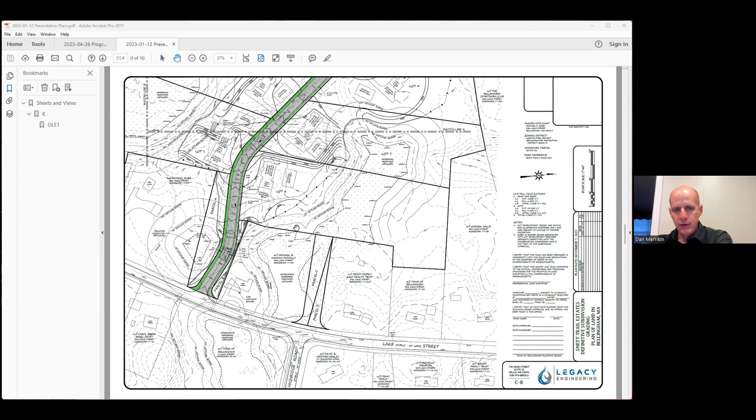Okay, just an update. I know you guys talked about this at your last meeting, but I was not there. Over the last month or so, 2 site visits were conducted by the commission, resulting in some changes to wetlands delineations. This plan doesn't reflect it, but in the small isolated wetland out front, there was a small expansion, which hasn't really changed anything. There was a minor flag change down here, which doesn't really affect anything. The bigger change was that...

Between the upper wetland area, which was observed at the last site walk to be a vernal pool—so it would be a local bylaw vernal pool because it has not been certified yet—a wetland was identified, basically resulting from periodic and intermittent overflows from this upper wetland down through a valley area that extends down through this way, which results in shallow ponding, shallow puddling, and some wetland vegetation.

So that was reflagged by our botanist, and it was inspected by the commission 2 weeks ago, I think. So we've had those field located, and this is the boundary that the commission observed. There you can see it's basically a thin wetland area that goes down right along the valley here, and then it widens out. This was the old end of the wetland, and it widens out at the end.

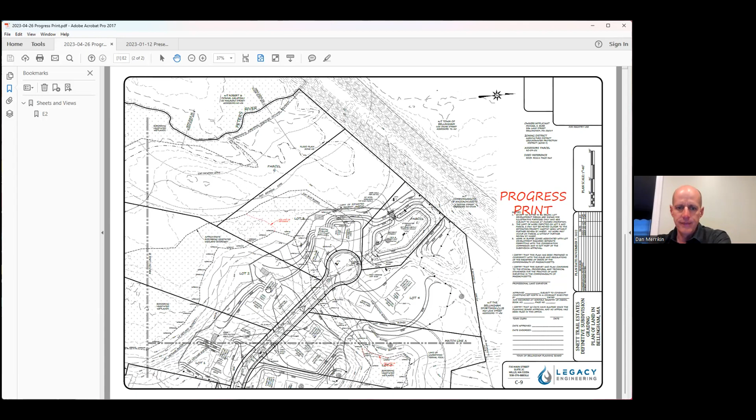So we are working on a revision to the design. This is the submitted plan, with that new wetland area shown. So there is now a crossing of the road through the wetland. We're working on a revised notice of intent, reflecting the fact that there will now be a proposed wetland alteration with a restoration area.

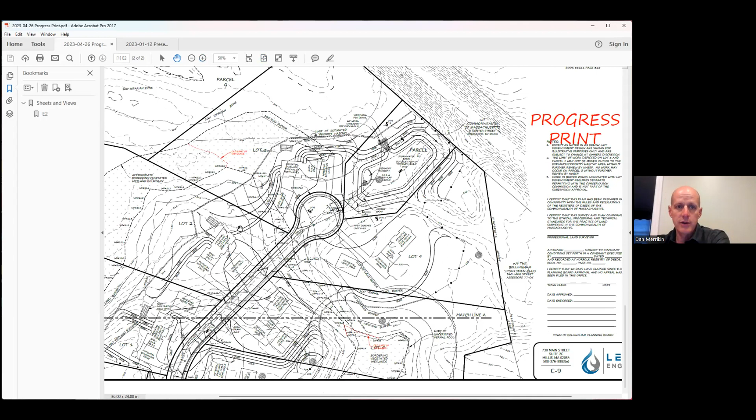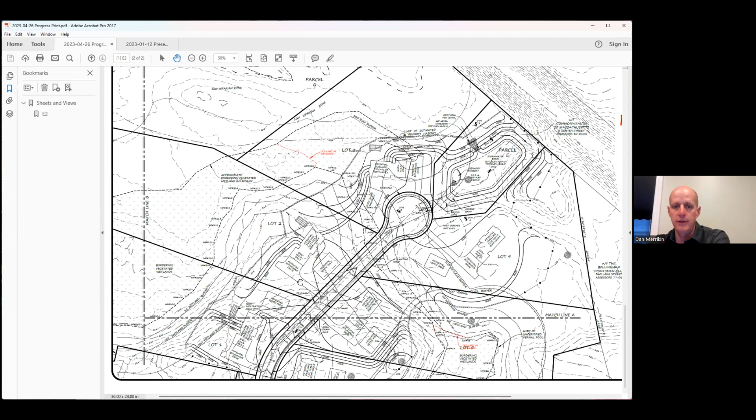And the restoration area will be located—this area down through here is an old cart path, and we walked it with the commission at the last site visit, and it looks like a good place for a wetland replication area. So we'll be proposing, in the vicinity of flag 209 to 203, a wetland replication area here, which will basically fall within the footprint of that old cart path. So I think that'll be a nice area to do some replication.

And then we are going to realign the road to take this cul-de-sac and pull it further away from the wetland area so that this lot and the house and the yard will be able to be further away from the wetland areas. There'll be a small, probably modification of the stormwater basin design, so we're working on all that. I don't have anything to show you on that yet. We're going to need, I would say, a month to get that revised design squared away so that I can submit it to you with an updated subdivision plan, stormwater report, and notice of intent.

Well, that is certainly the drill. Dan, that's in a nutshell exactly what's occurred in the last two site inspections. I will just say that the area you're proposing for replication, we did some preliminary field evaluations by hand auger and found that immediately adjacent to that cart path there were hydric soils, and once you got through the area that had been historically filled, there was an area of original A horizon there, which was hydric.

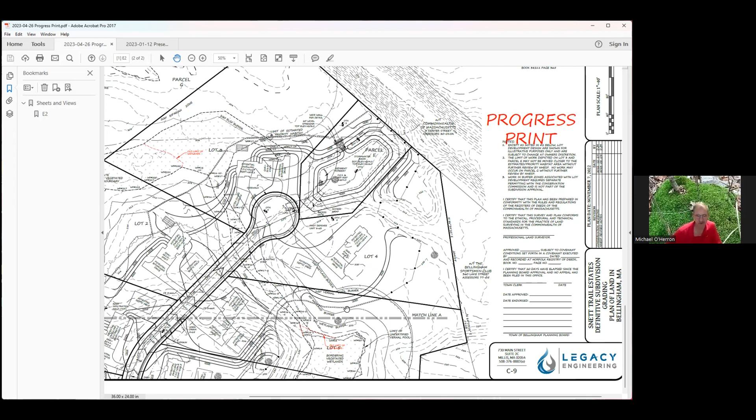So there's actually a lot of room on lot 4 for the house. We weren't sure what other areas might be like depressed areas or wetlands. No, this is a big hill, and this is a big hill. And this is the old cart path that leads down to the river. So there's lots of room, upland areas for lot 4. So what we're going to do is transition this cul-de-sac out into this territory. It'll open up room over here, and then this house will probably slide back into this territory. Gotcha, okay, so it's not impacting the full vernal pool buffer, great, okay, thank you.

Very good. Any other questions or comments? All right. We have only one meeting in May because the commission is obligated to attend the annual town meeting, which always occurs on the second Wednesday of May. I don't know why it's always on one of our meeting nights, but it always is. And so...

What we'll do, knowing that the applicant will need some time to complete these revisions, we'd like to continue this to the evening of Wednesday, June 14th at 7:30, which is our first meeting in June. So moved, June. That's Michael. Is there a second? Second, Neil. Any further discussion?

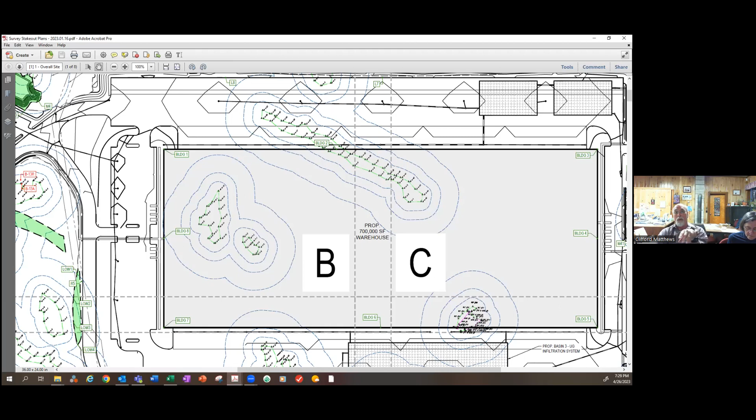So it's operating in a marginal capacity. Is that a fair characterization? Yes, in our site visit, we did not discover anything that would indicate, as the local bylaw states, breeding activity. But what I'm going to say is that, as our administrator pointed out, vernal pools are ephemeral, and year to year they function in different manners. Last year there were a couple of egg masses there, and that does constitute breeding activity. So Austin, what we're going to do is we're going to ask that that area be included in the area that requires mitigation, along with a couple of other areas that are proposed to be impacted.

Yeah, and I agree with you, Cliff. The purpose of me saying that wasn't to try and get it out of that. It was just to kind of understand and characterize the conversation. But we'll talk about some of the mitigation, because we had a productive discussion on that as well. The second item we did, this area here that I'm circling, that's wetland Y, the one that, if you recall, was kind of a newly identified resource area as part of these discussions, and one which exhibits the characteristics more traditionally of an active vernal pool area, right? So we looked at that and confirmed essentially what we already thought we knew, which is there was activity in there. I think we found some fairy shrimp as part of that initial sweep, if you will, on Saturday morning.

Yes. Okay. And then we continued our journey across the site, and we got down to this little spot here, which is our southernmost replication area, which is going to be serving as wetland, and even more importantly, vernal pool replication. We spent some time looking in there to see if it was an appropriate location. We did some light soil augering and some shallow excavation, and it looked like, at least on our initial reaction collectively as a unit, we thought that area looked favorable for wetland replication and vernal pool replication.

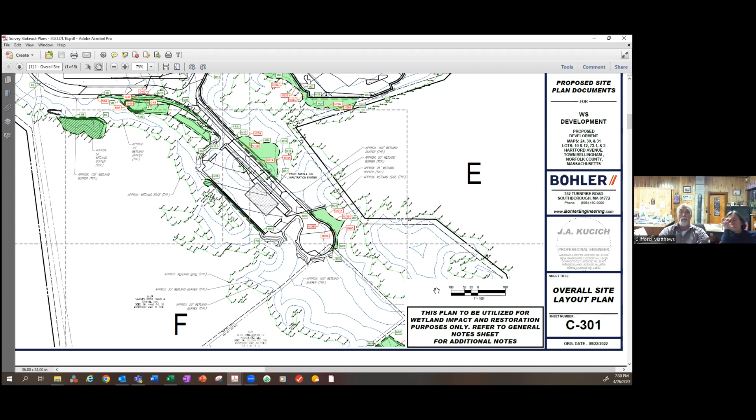Austin, just a quick point of order, if I may. Also, if you go back, back to the east. Okay, we did look at the isolated area, which was a deep pocket. I think it was wetland U.

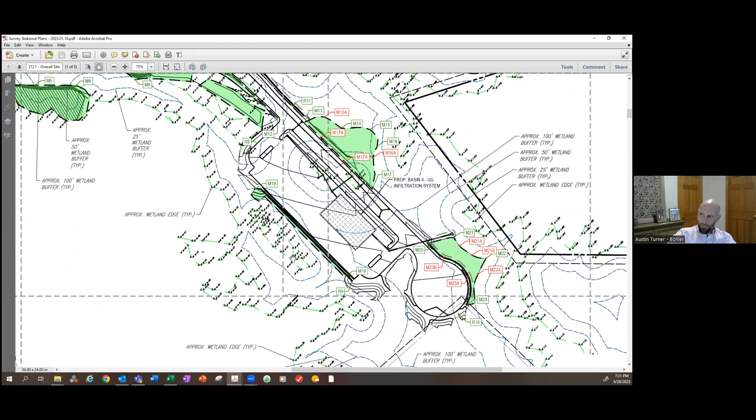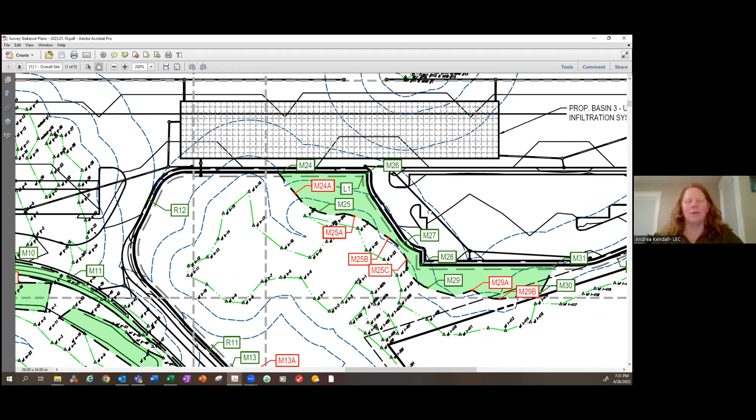I thought you was— oh, that's Q, sorry. Yeah, I think you're right. Brian, you want to navigate me to where U series is? You keep going, you're going in the right direction. Yep, a little more, okay. No, now move the other way. Go to the right, this way? Right of Y, north and east. Correct, yeah, there's this pocket right here. Yep, that's it. Is that you? I think that's you. That is you. Okay, yes, it is, fine.

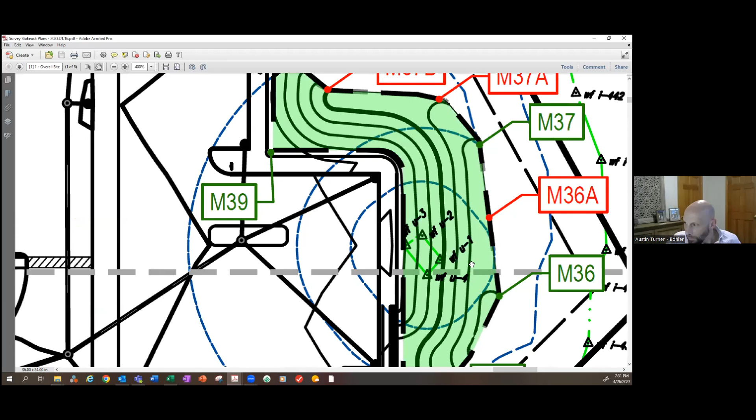All right, so when we were out there very early on, was it this year? I can't even recall, we've been out there numerous times. We were out there and identified it as being possible. Brian indicated that in all of his observations, there was no vernal pool activity. But the last time we were out there, it had apparently the depth that might provide breeding activity possibilities. So we reviewed that and found no activity. It was dry and had been dry. Brian is there, I think he looked at it last spring.

And was the hydro period too short there, Brian, as well? Yeah, this is the third year we've taken a look at that area, and there's been no breeding activity, and yes, it does dry up rather quickly. Okay, so then I think the commission will concur that we don't have to worry about including that in any kind of future restoration or mitigation efforts.

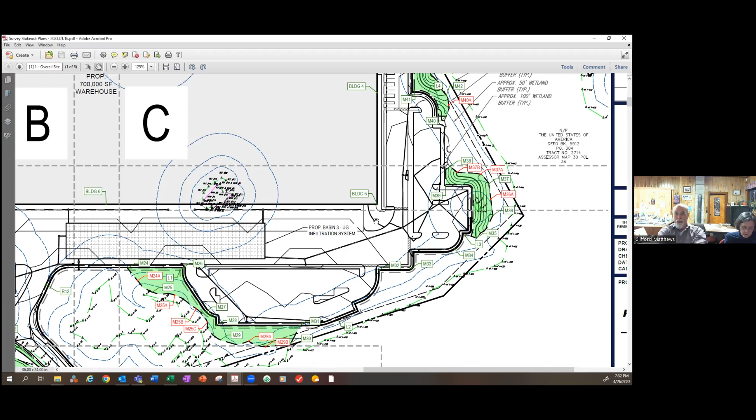Thanks, sorry, no problem. I'm glad you stopped me because I do recall us going over there, and then we walked kind of cross country over to this mitigation area, which collectively we thought felt appropriate given what we saw in terms of elevation and general site features.

We did some light augering and some holes to see what the soil material looked like, and all those things felt like we were trending in the right direction. One of the notes I made was there were some cedars growing in there, and we were going to take special care as the design evolved, and presumptively when we get to construction, to maintain those species.

Because we felt that was going to be an important characteristic of that system. That correct? Yes. And I think Brian and Andrea had indicated their intention, that their plan was to flesh out and come up with a comprehensive plan for mitigation.

We also did some soil work there and found that it appears groundwater is extremely close to the surface in that area. And based on that, plus the immediately adjacent area to the south...

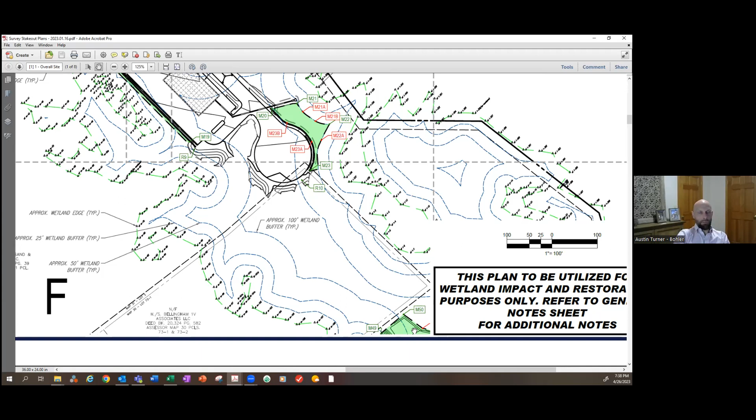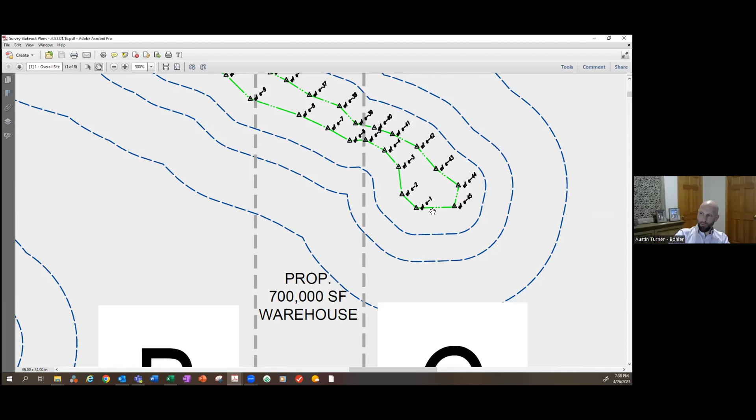The mitigation that we have on this plan is direct replication right now. It's approximately 64,400 square feet. The ratio there equates to about 1.6 to 1. In that 64,000 plus square feet, the vernal pool areas we're talking about include the entirety of Y, which is the green boundary. This little purple boundary is what has been established as the mean high water level, but we're counting all of Y in that mitigation, which is the green boundary plus an expanded footprint. And then this lower lobe of E, essentially between flags E42 and in a clockwise pattern to E3, is what we established. Cumulatively, those two vernal pools are approximately 4,400 square feet. So by way of a quick reset, we have over 64,000 square feet of actual wetland mitigation proposed.

4,400 square feet is what's being considered vernal pool alteration. That 64,000 square feet, what we're expecting is for it to operate like a high functioning wetland system and vernal pool. So the model we talked about in the field on Saturday for that southerly mitigation area, we're going to employ it. The idea is that we establish about 64,000 square feet of that.

So if you look at it strictly from a vernal pool perspective, it's a pretty large ratio, right? If you look at it from BVW or wetlands generally speaking, it's about 1.6 to 1. I feel like, personally, and I'm not objective in this conversation, we're starting to get close to refining the mitigation package, particularly being sensitive to what you, Cliff, and the commission had talked about, wanting to not disturb established buffer zones or areas to create mitigation. So what we're trying to do with that 1.6 to 1 is replicate these wetlands and enhance them in areas of the site that would be considered degraded or worthy of enhancing. I'm offering that just for a quick reset to make sure we're all speaking the same language and on the math, so that as Andrea and Brian continue to evolve their design, we're doing it in lockstep. Does that generally make sense?

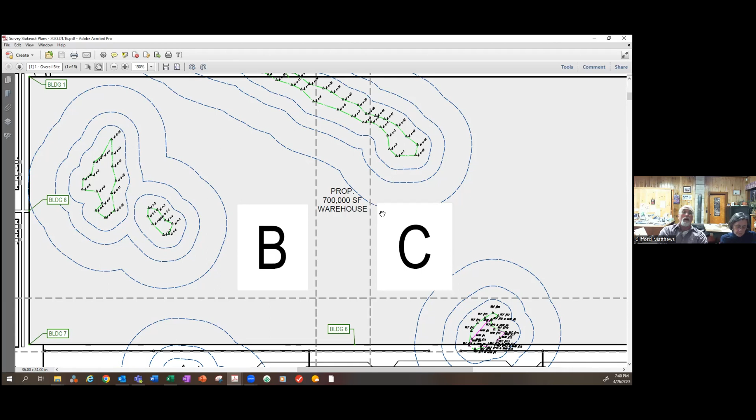I understand, and I believe the commission would agree that this is going to be a requirement for the development and the footprint and ancillary necessary attachments to the building.

Yeah, I know, and further on in this meeting we want to talk about the roadway, and we'll talk to Jeff about that. But I think what you're saying, Austin, is something that the commission understands. But I'm going to ask right now, is there anyone here who has a question, comment, or addition to what Austin is saying?

In terms of, no, I think his summary is accurate of the current situation and their current replication efforts and our discussions. I think that's generally where we've been talking.

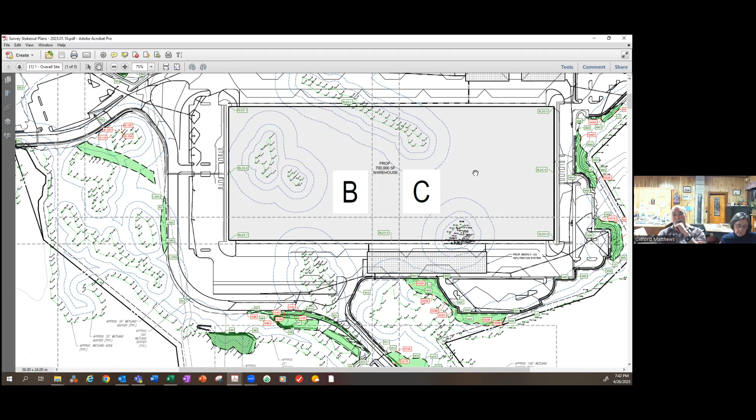Yeah, I think that the actual replication for vernal pool, and previously we asked Brian and Andrea to provide information where they've done vernal pool replication, or they're aware of vernal pool replication. And I know they're going to be searching through available information to determine the success of these things. Rather than replication, I think it's more of an enhancement somewhere else. But I think that's semantics right now. I think the concept for what we're looking at here is we're moving in the right direction. Good, because I'm glad, because I feel the same way. And I actually was thinking about this on the ride home on Saturday.

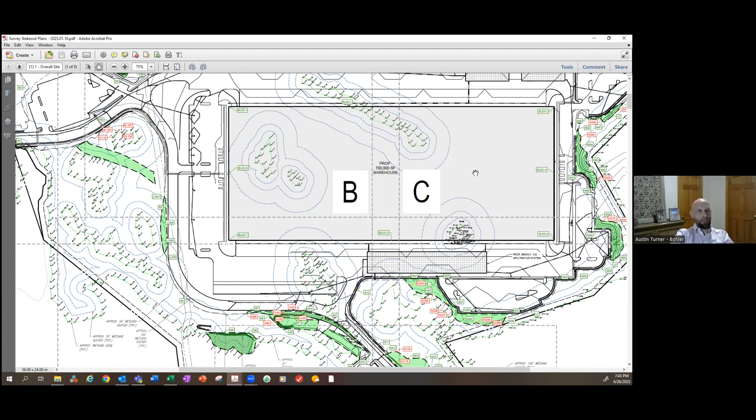I felt like there was a really productive site walk that we had on Saturday, because things were starting to kind of come together a little bit. We spent a lot of time looking at the data and figuring out, as we should have, and all of a sudden that resulted in, oh okay, this is all starting to coalesce a little bit. So that was productive.

Mr. Chair, if you don't mind, Cliff, what I'd like to do is pivot to that area next to, I think it's this one you were talking about. Also, can you just hold on a second? I think Michael had something he wanted to add. Austin may be about to cover it.

I was going to ask about when he was referring to areas where we might not try to get into affecting an area that's already functioning as a vernal pool or a good wetlands area, and instead go to less desirable sites. That's the one that came to my mind, the area you're about to circle around, where we have the two vernal pools functioning pretty well. We were talking about creating more area around them, but ending up disturbing them so much that I had strong reservations about that after we talked about it the second or third time out there looking at it. So go ahead, Austin, you're probably about to address that.

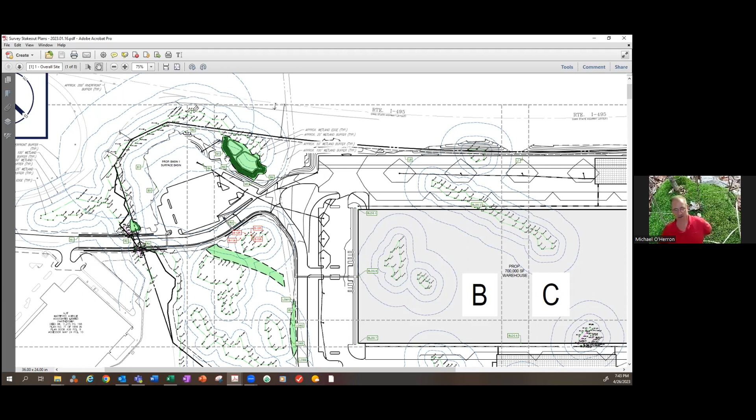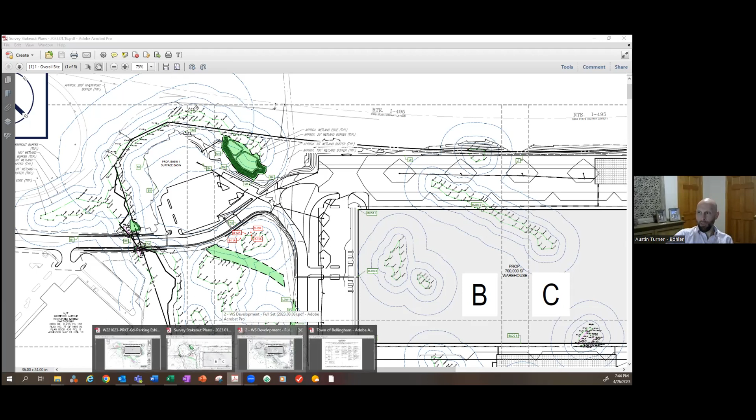No, I'm glad you offered that context, because I recall that discussion when we were out in the field, maybe a month ago or so. Also, having watched the last hearing, which unfortunately I wasn't able to attend, and talking to our team, what I understood was there was some discussion about this, and still a little bit of hesitation about it being the ideal position for some of that mitigation. So what we talked about, if you recall, I'm going to pivot to a plan which shows some topo real quick, just so we get some further context.

So this is that area in the back right here. This is the mitigation area. This is that parking lot, which I have parking stuff I want to talk about too. But if you recall, when we were walking out there, we were kind of in this area that I'm highlighting with my hand, or my virtual hand anyway. And if you recall, there was a lot of flat spot in there, and we did a little bit of soil augering, and found there was maybe a more restrictive layer about 1 foot to 18 inches down.

It felt and visually looked like it was an area that may have some seasonal flow through there or something, and it felt like that might be a decent spot for some enhancement. So what we're considering as a team, rather than doing this, which has some earthwork attached to it, is perhaps using that area instead, because it's flat, low lying, with very high canopy trees but not a lot of established understory vegetation yet—pivoting this mitigation to really enhance that low-lying space between those knolls and some of those ridge lines that were through there. It felt like, based on the discussions we were having in the field, or the observations we were making, that may be a more appropriate location for this.

And I would appreciate the commission's feedback, at least high-level feedback on that.

Weren't you going to be doing some further digging? The augers only went so far, but Andrew and whoever else was augering out there didn't get so far down—you guys talked about doing a test pit or something out there, didn't you? Yeah, you're absolutely right, and we're at the event horizon for that. I'm just getting the excavator schedule pinned down, and once I know the dates I'm going to communicate that directly with you so that we're not just out there digging holes with people wondering what's going on. I just need the dates pinned, and I'll let you know, Ann, so that if you wanted to come out there and see what we're doing, you're welcome to.

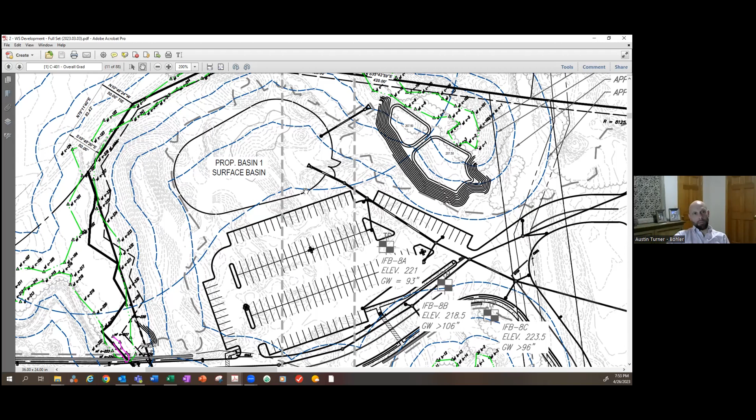So what you're looking at as a conceptual plan here - I think what the commission was looking at was going back to conversations we had with Jeff relative to the abandonment of access and a bypass road. To us, that means abandonment of the bypass road and the crossing from North Main Street, yet the right to develop those in the future has been preserved. The commission has been pretty clear about that right along.

I know our minutes have reflected in the last couple of meetings that, historically, this is the 10th major warehouse in the town of Bellingham. We have 9 other warehouses between 200,000 and 400,000 square feet. This one is 700,000 square feet, and we're all aware of the impacts associated with the development of this building.

We feel the best way to provide the mitigation that's required - and we were clear - conservation restrictions on regulated resource areas, that's nice, it's an extra layer of protection, but that's really not mitigation. The abandonment of that area was what was represented to the commission before.

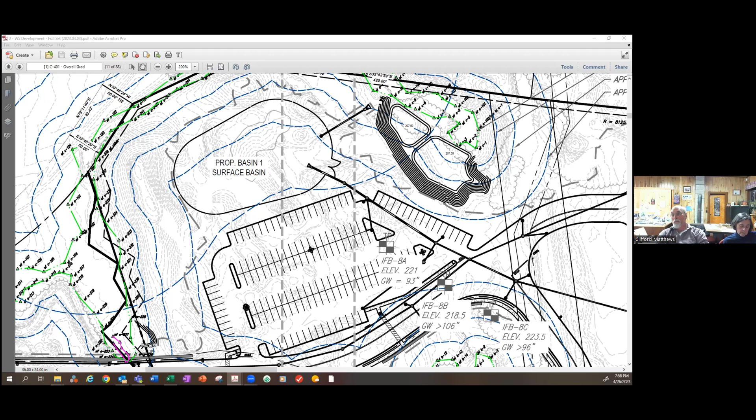Well, okay. We're working closely with the planning board on that, and we're looking at the impacts created by that particular area, as well as the crossing, which is preserved. That crossing has not been eliminated because the access is still in place.

And I don't think anyone is suggesting you're planning on building the road now, but by not giving that additional protection to that part of the site, the door is being left open in the future to create that roadway. The crossing and roadway you're referring to are the access out to North Main Street and the so-called M crossing once upon a time? Yes. That's not proposed here, obviously. If it were, it wouldn't be by me, because I understand the commission's position on it very clearly. But

it would have to be judged and evaluated based on the merits of that particular project, should one come forward. But there is other land down there that is available, that is upland, that doesn't require access out to North Main Street and doesn't require a crossing at Wetland M. In fact, some feedback from town staff has been that to the extent there is further development down there, depending on the nature of that development, they'd prefer to see it accessed through Crossroads and via Hartford Avenue versus an access out to North Main Street.

So I think this, and I don't want to lose sight of the fact that the parking is a necessary amenity for this project. I want to make that clear. But the road does facilitate future development for developable land there, and it accesses it in a way that, again, depending on the proposed use back there, is consistent with where town staff has suggested we provide access.

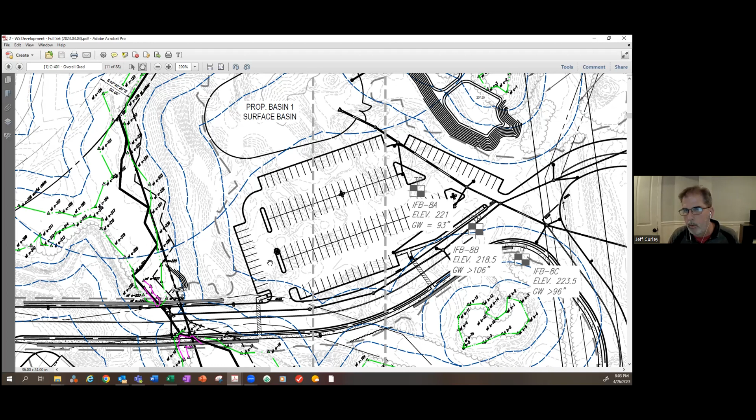We have taken a harder look at the limits of the proposed parking. We've looked at a combination of compact spaces, relocation of some of the parking on site, trying to stay net zero with respect to the number of parking spaces. He was prepared to go into more detail, and I know we've run out of time tonight, and we can do this at a future hearing, but we do have some preliminary ideas we'd love your thoughts on for reducing some of these parking area footprints while trying to maintain the number we're trying to hang on to.

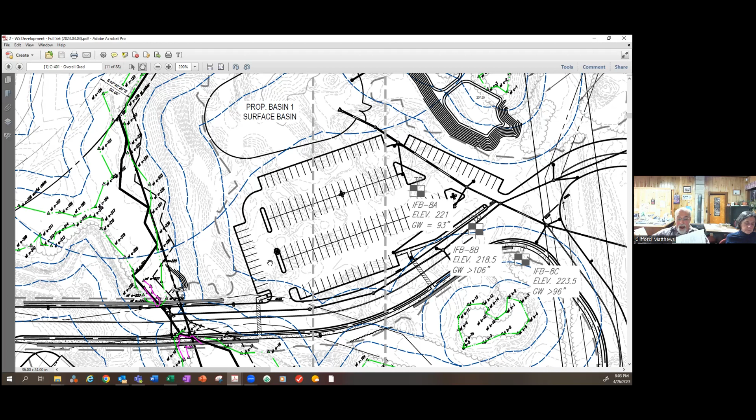Okay, I think we have some work to do here. We will be communicating with our peer reviewer to start getting him on board and prepared to review some of the information that's going to be coming in. We have only one meeting in June because we are obligated to attend the annual town meeting, which always occurs on the second Wednesday.

So I'd like to continue this to the first meeting in June, which is June 14th, which is already following up pretty quickly. And we'll look forward to seeing your information. I'll entertain a motion to continue the hearing to the evening of June 14th at 8 o'clock.

I'll second, Mr. Chair. I'll move it. It's okay, takes a few meetings. Okay, I think I can recognize our voices now.

All in favor of the continuation, signify by saying aye. Aye. Opposed? All right. Then Mr. Chair, do we have a time for that meeting? We do, 8 o'clock. June 14th at 8. Thank you everybody. Thank you all, appreciate the care. Take care now.